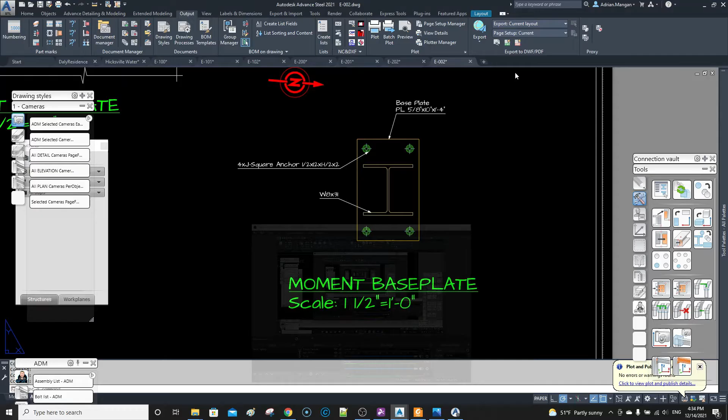Hi, so this is a kind of a video just about labeling and anchors. And so what we have here is a J square anchor, and I don't really like the label so much. So we're going to change it around a little.

So what we're going to do is we're going to go into the anchor. So go to the management tools and open it up and go to this J square anchor, which is 12 inches long, half inch. So half inch anchor. So first of all, we want to go to the J square anchor and then make sure you're on the right size here. So whether it's going to be 3/4 or it's going to be half.

Now, is there two halves? There's not. Sometimes there's two, like two 5/8 there. So the half inch one. So what I'm going to do is I'm going to change them all, but for now I'm just going to change that one. So it's the 12-inch one. So this one here. So what I'm going to do is I'm going to change the half inch out,

and I'm going to put an inch, the inch, half inch long, and then I'm going to put the J part in brackets. And this is probably not the way you're going to want to do it, but this is just showing you where to change it.

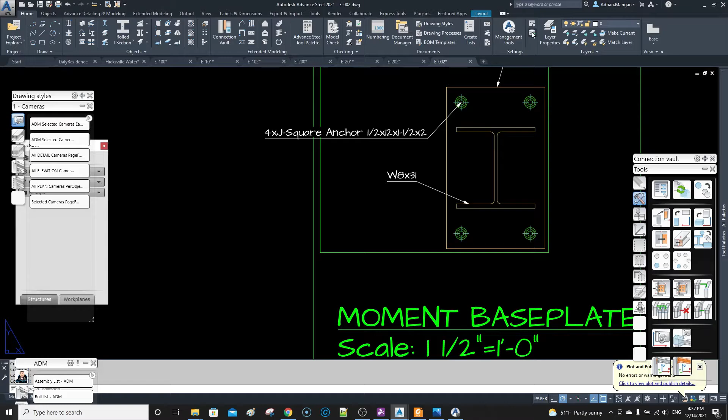So we're going to apply that change. That should be okay. And we're going to minimize that. Then we're going to come in here and update, and I usually hit it twice. And then we're going to go to the model, and I'll just hit it again. And what we're going to do is come in here. We can't change it that way, right?

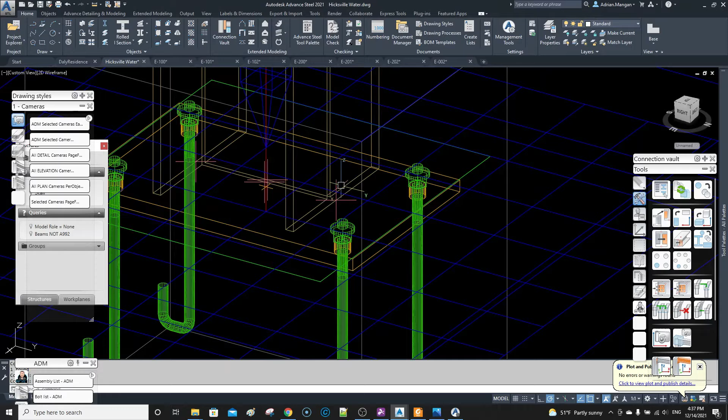We want to come back into the actual, and if you can see, the nut and the washer are upside down, so that's another thing that has to be fixed. So let's not worry about the nut and the washer for now. So we're going to go base plate, and we're going to go anchor, sorry, and then we're going to just switch out of that and then switch back in again. Square anchors.

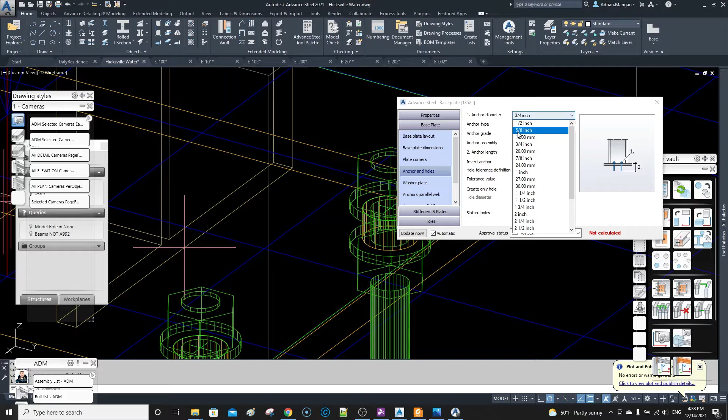It'll be half inch. So it just was showing the nut and the washer wrong because I changed the type name. So it was just kind of telling you that there was an error, I guess. So now we've updated those, and now we're going to go back to this detail, and we'll do update and update this, and this label should update.

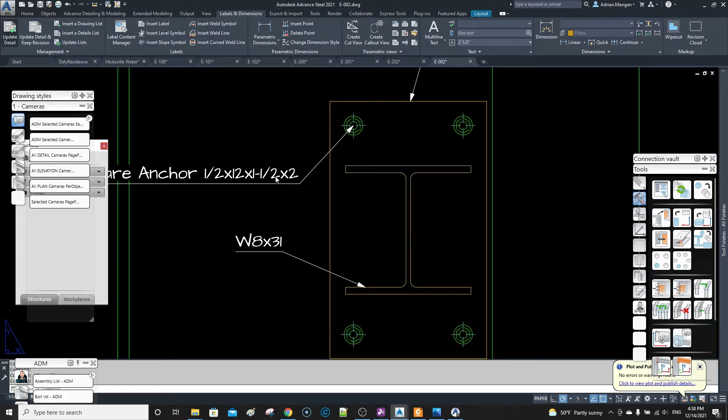And you can see that I didn't pick the right one. This is 18 inches long, so I didn't pick the right one. So let's go back to the model, and we can see they're very long. Go back to the anchors, and I didn't check the length, so we can see it came in. We'll switch that to the 12, okay, because the 12 was the only one that we updated the label on.

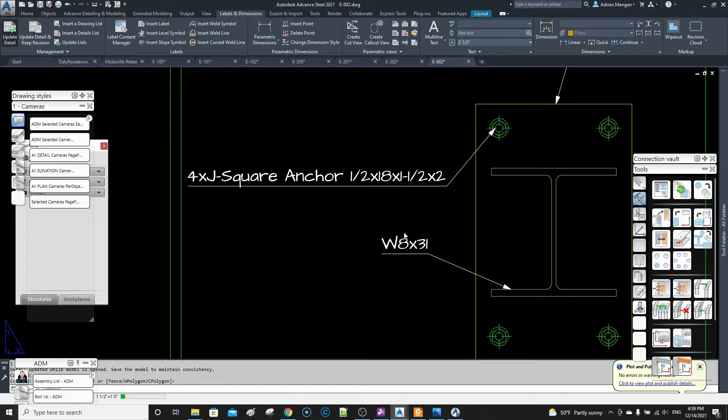And now we're going to come back here, and then what you want to do is go back in and change them all if that's what you want. So we can see we've lost everything there now, so let's update the detail again, see what happens. So if something like that happens, just close this out

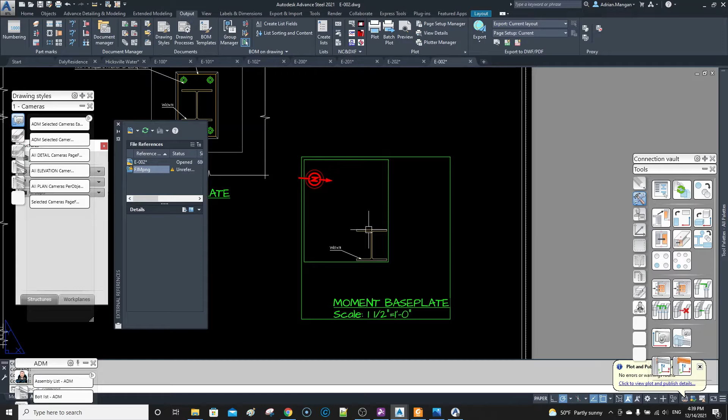and go back into your folder, and we can actually go this way. It's probably quicker. Show camera detail, and then label, update detail, and now it's come back in, and it has come back in with the incorrect label. So my label has not updated.

Alright, so a J square anchor, it's a 1/2 inch by 12 by 1-1/2 by 2. So let's go back into our management tools and just see. J square anchor, and it's a 1/2 inch, and it's the 12-inch one, which I did change. So what I'm thinking is that's not going to work, and that diameter symbol is throwing it off. That's why it's not working.

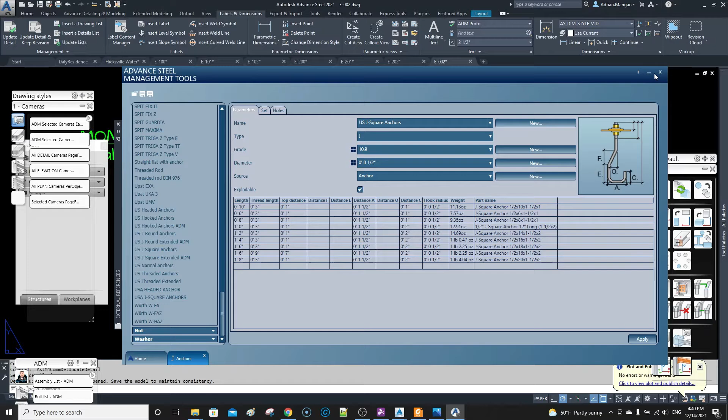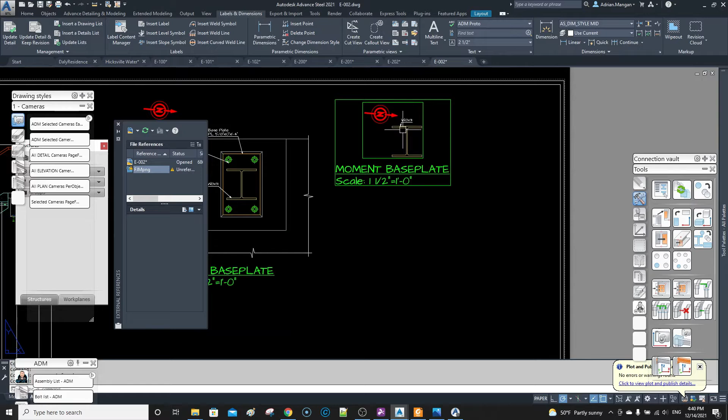So let's come back in here, update the defaults, and it's still not updating. So what we'll do is we'll delete it. Let's go back out, select the camera, and we'll put it back onto that page and see if it comes in right. Now I did this before and it did update correct, so I don't know if this is the problem. You can see we've lost everything there, so it's interesting.

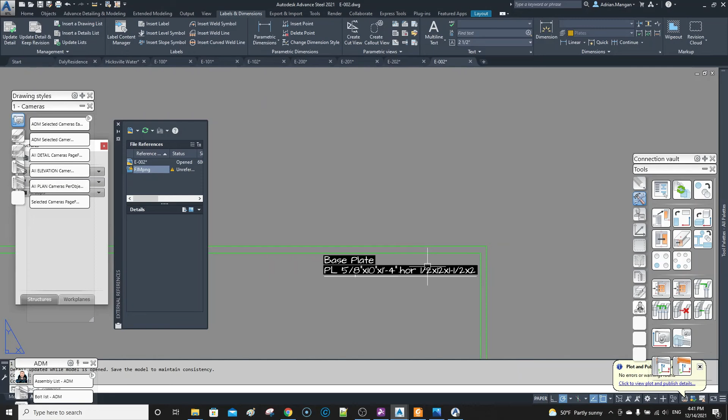Right, now the base plates come in, but I'm missing the labels, so you can see the green box is not around it. So that means there's some labels up here. So if we zoom in here, let's see what labels we have. So we have the anchor label, but it is the old anchor label. So that has not worked. So update it again, the labels should come in. And the labels have come in wrong again.

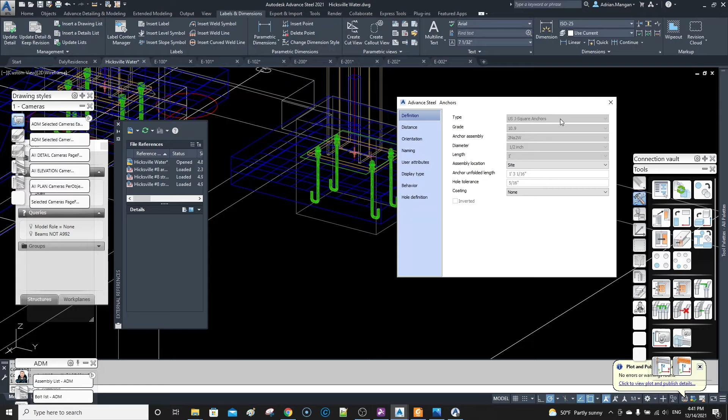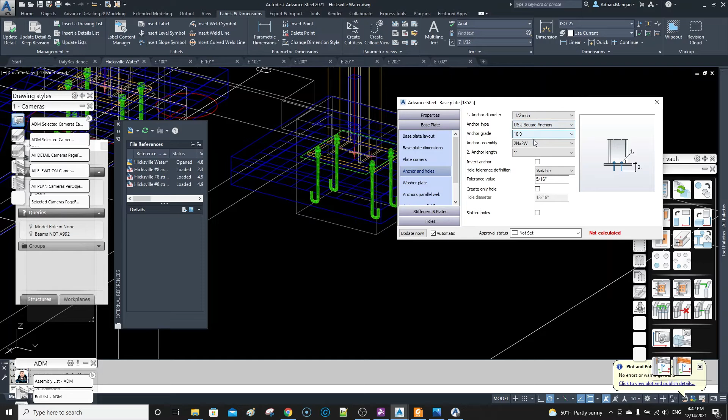So, shouldn't be the case as far as I know. 2 nuts and 2 washers, so maybe that's the issue. Let's change this. So this will show you that is probably the issue, the 2 nuts and the 2 washers. So base plate, anchor holes, nut and washer. So change that to nut and washer, back to the one that we're upside down, and this will probably work.

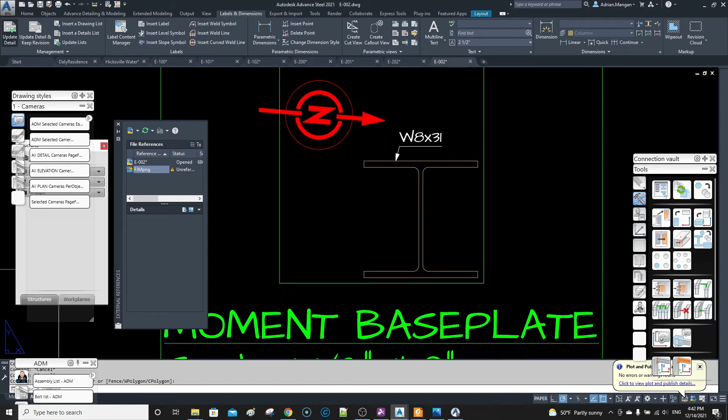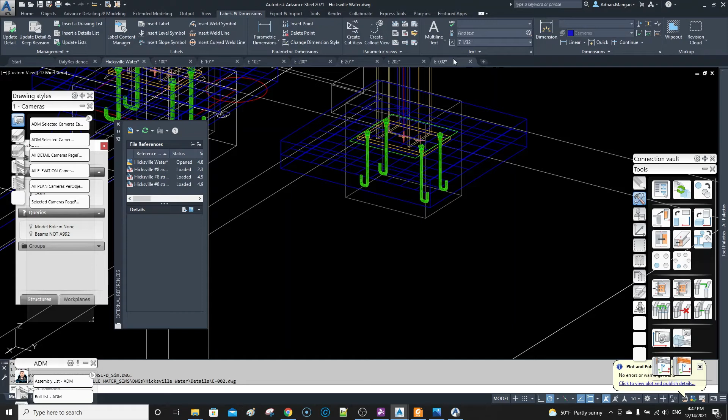So what you need to do then is, again, the base plate has disappeared. So what we'll do is we'll just output this again. Put it back on that 002. That's it there. Update detail.

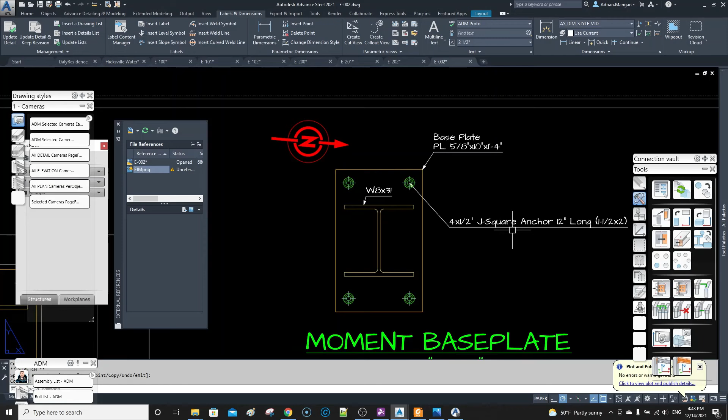Sometimes this happens. I don't know what happens with everybody, but it certainly happens for me. And there you see, it has come in correct eventually. I'm sure most people aren't going to watch the video that long. So now what I'll do is I'll just continue with this video, and then I'll do a shorter video just to show the same effects, not actually doing the process, but just showing what I did.

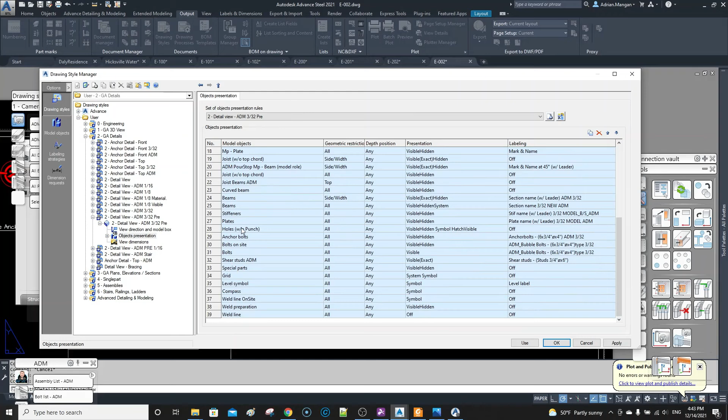So what I want to do is I want to go to output, and I want to change this again because I don't like the 4x at the start. So object presentation, and we want to go to anchor bolts, and we can see here this is our anchor bolts. And let's go into the label. Let's see what tokens we have. So we have token for anchor part name, and we have the number of the bolts, and that's fine.

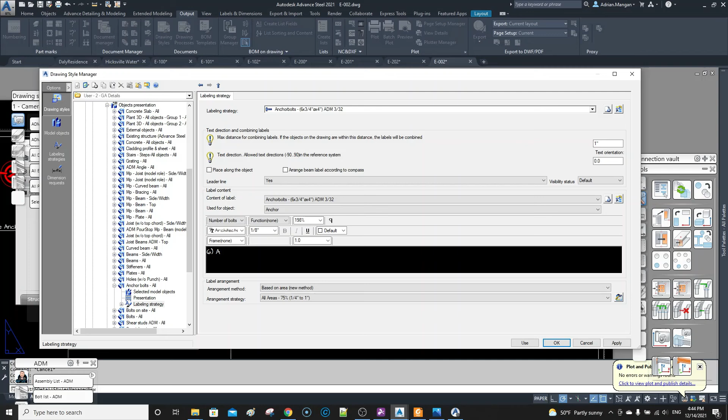So what I'm going to do is I'm going to create a new one for myself. So it's going to be anchor bolts. You know what? I don't want to create a new one. I'm going to cancel out that. I'm just going to change this existing one because it's already my one. And we're just going to put this in like this, and apply, use, and then select this. And there now we can see there's 4 anchors, 1/2 inch, J square anchors 12 inches long, and then this is the curve on the bottom of them.

So I hope that helps. Long video, sorry, sometimes doesn't work out as you want.

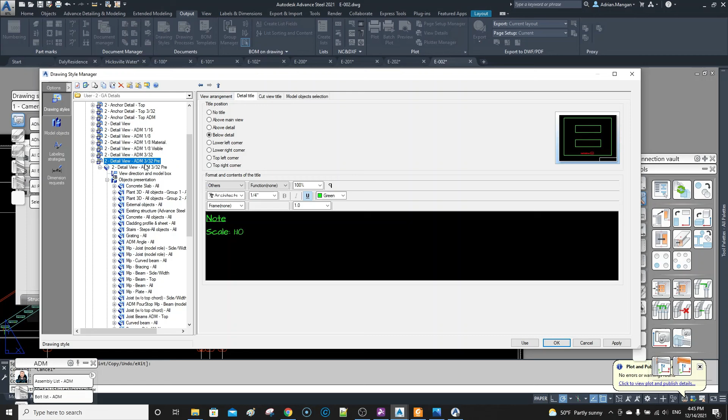As you can see, this is also pretty small, so you can just go back in here if you want, or you can just edit it by clicking on the green box. But I'd like to change the scale back a little closer to what I usually use, so next time I won't have that issue. And then we'll update it, and there you go. Alright, so you've updated the label and you've updated the name of the bolt.